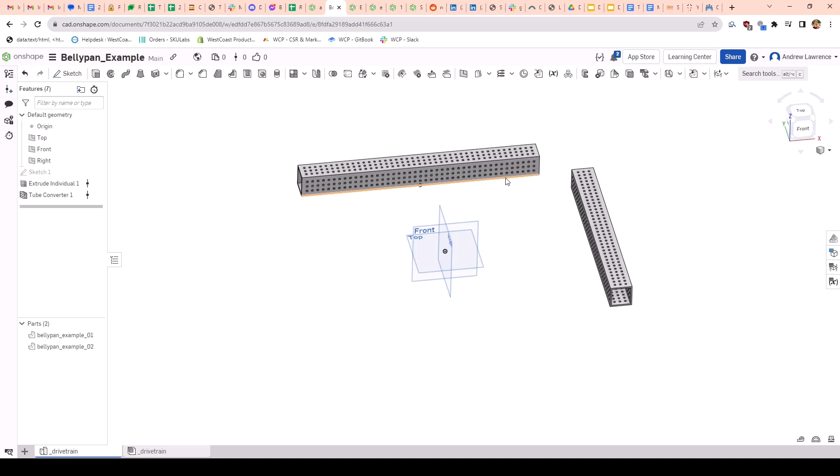So this is the assembly that we have so far. If we go over to our part studio, we have these two parts made right here. These tubes are the drivetrain tubes, as seen in the positions of the drivetrain.

If we go into our master sketch here, you see the sketch drawn out so that everything is in the correct location. You see the little swerve module over here in the corner. I know the student robot project does not have it in this orientation, which makes things harder, but I trust you'll be able to figure it out. The solution between what you have and what I have is not too difficult to solve.

So our belly pan is going to go underneath the tube. We're going to go down there and select a face, click Shift S to create a sketch, and N to go normal to the plane.

So this is what we have right here. We're at the face at the bottom. We're going to start with a large rectangle, so I'll use the rectangle tool.

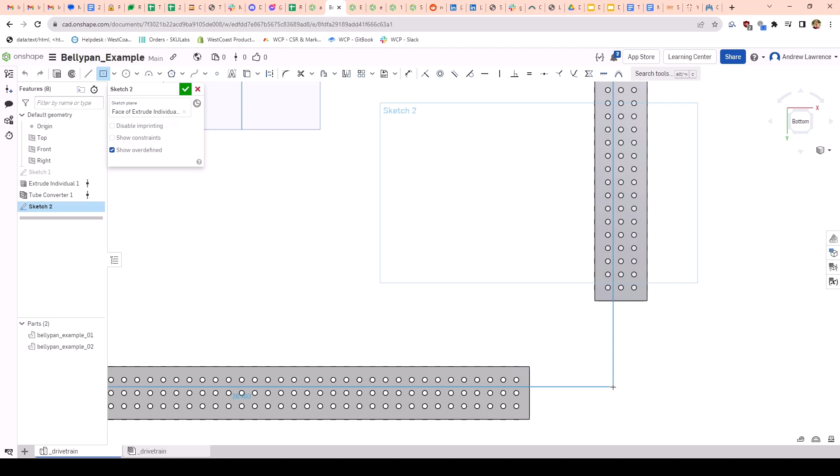I want this rectangle to slightly overlap the innermost layer of holes on each tube. Since this is the center of our robot, we know the other tubes go here and here. We can just use these two as the reference.

So I'm going to place a point inside some of these holes. That just gets me the center of the hole to reference.

If I were to dimension off of the hole by itself, as I'll show you here, if I try and dimension off this hole to this line, it's going to give me either the least or the greatest distance for some reason. If I go to the far end, it'll give me the greatest distance. And I don't want the edge of the hole, I want the distance to the center.

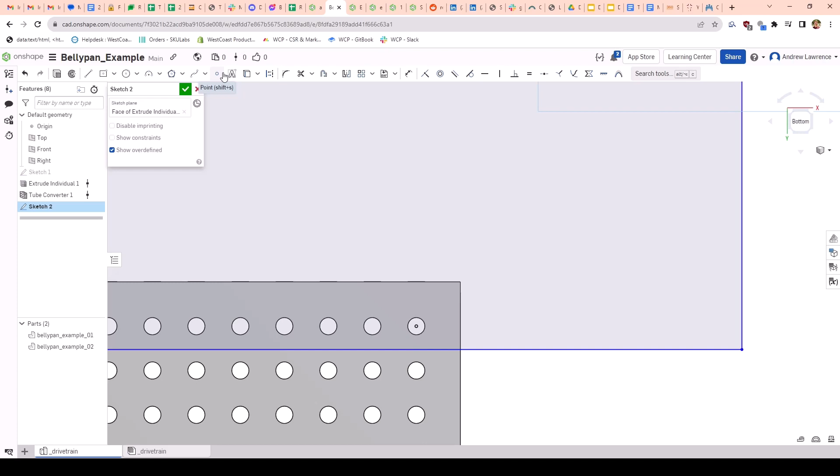So I put a little point in there. I use Shift S, the same command to start a sketch. It gets you a point when you're in the sketch area. Or I can come up here, select point - see how it says Shift S up there. So I put a point in the middle of those holes.

And I'm going to dimension from those holes, or from the point, 0.25 inches. So we want to go about a 1/4 inch out.

I like this value for two reasons. The first is that we minimize overlap with the other sides, so we're not covering these other holes - they're still useful for other things. And also it keeps our belly pan no bigger than it needs to be.

This is all we need. You don't need double layers of mounting, so we'll keep it there. And you can see our sketch is now fully defined. We have a center point for our center point rectangle, and then these two dimensions dimension the length and width.

Because this is all top-down design, it's all referencing other previous features. So if we click, we can go down here, we can see our width. It says length, but our width for our belly pan is 25.5, our length is 28.5. I always use, in a rectangle, width is the shorter dimension and length is the longer one.

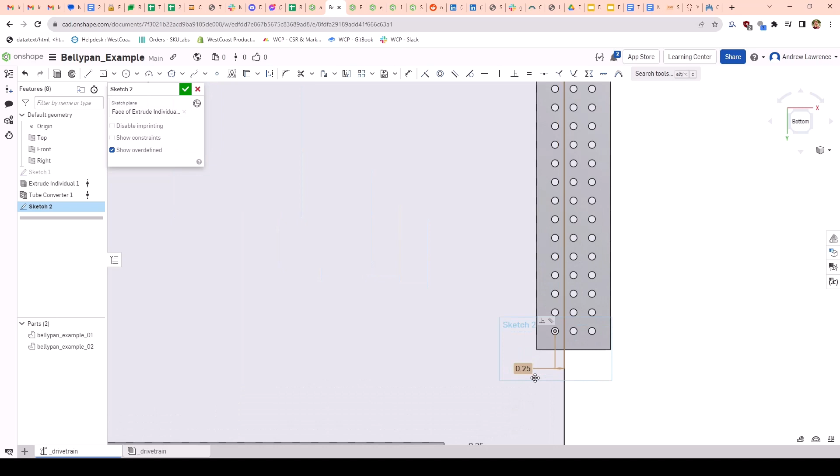That doesn't really make sense, it's just some arbitrary system I've used over the years. I don't know, it makes sense to me. If you have a rectangle, the width is the shorter end. But do whatever you like. We know those dimensions, and it's important to know them - we'll come back to those later.

So alongside this, we have the rectangle for the shape of it, and then we also need the mounting holes. Luckily for us, if we're designing this the right way from scratch, we have the tubes in the right locations - we can reference those holes. So I look here, I have those holes already there. So I'm going to click U for the use command.

It's the use project convert command. My cursor's turned into a little reticle, a plus sign. I'm going to go highlight all those holes, making sure my highlighted area is over the holes but not over the line I've made. If I do that correctly, give it a second, it'll first select the outside, then realize I want the inside, and there it goes. It has selected all the holes, so those are now sketch entities I can use.

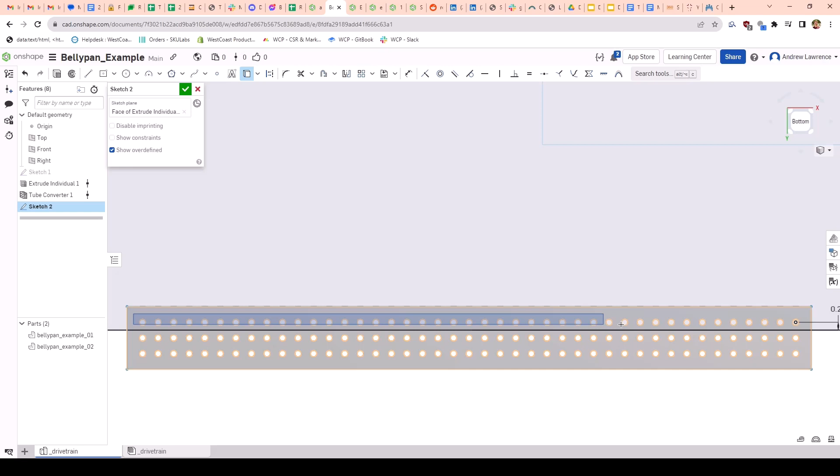I'm going to do the same thing here at the bottom one. I'll click and drag in there, give it a second. It's going to select the outside first, then it realizes, nope, you want the inside, and it selects the features on the inside. So we get those. Having those is very nice.

However, we want them on multiple sides, so I'll create 2 sets of lines. Onshape is being slow because I'm recording, so give it some time, be patient. I'm making these lines midpoint with the origin, and I can make them construction geometry. The purpose for these lines is to give us a mirror plane, which will mirror these holes over to give the mounting holes for the other sides.

So over here, I go to the mirror command. It says select a mirror line. I'll select the horizontal line, and then I'll click and drag to select all these holes. Give it a second, there it goes. It even has a little point in there, that's fancy.

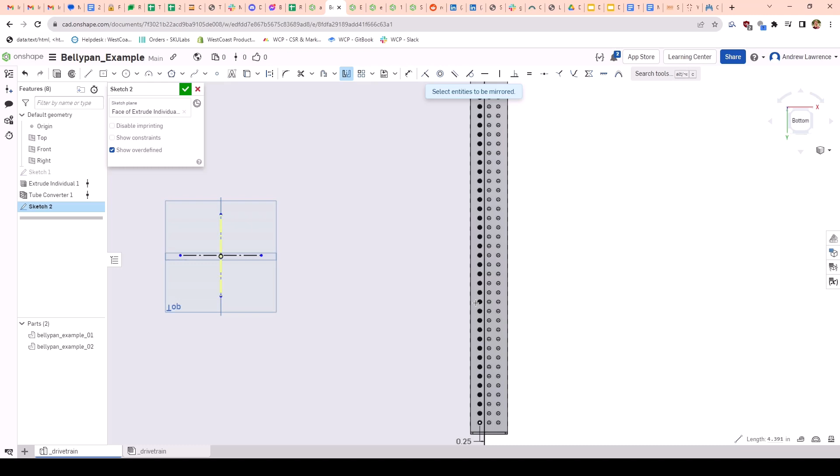Then I deselect the mirror command and reselect it, which allows me to pick a new mirror line. So I'm going to pick the vertical line, and then let's see if I can get it outside of that command. Select these. And there we go, so we have the outline shape of our belly pan.

We have all of our mounting holes. That's a good start, so we can extrude this. We say Shift E for extrude, and you can see it's extruding down from the tubes. We want it to be a new part, blindly extruded, for 1/8 of an inch, 0.125. That's going to be the thickness of our belly pan.

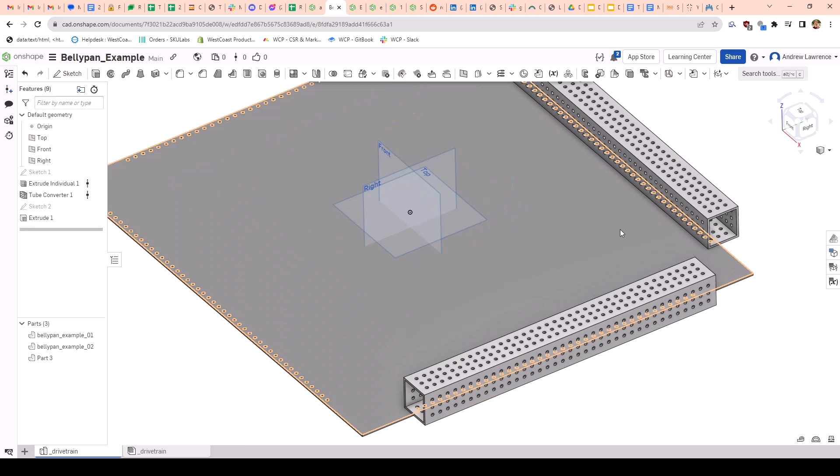So we have this, you see the corners do overlap with the swerve. Don't worry, we will take care of those later. But for now, let's focus on getting the diamond pattern in, which is a very fun part. I'm going to open up a new sketch on the large face of the belly pan, and I'm going to do 2 things.

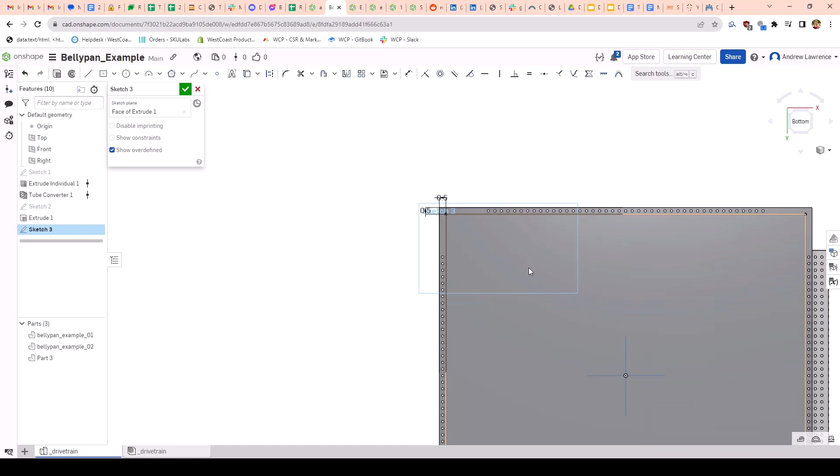The first thing I'm going to do is create a rectangle that is exactly 1/2 an inch from the outside faces - 0.5 and 0.5. This rectangle is to define the bounds of which areas are included in the diamond pattern and which are not, so we don't want cutouts where the mounting holes are, that would be silly. So we have that rectangle, and the dimensions of this rectangle are 27.5 long and 24.5 wide.

Good numbers to know. Now we're going to create a line using the line tool - it'll be construction geometry. We're going to make a diagonal line from one corner to the other across, and this is going to be roughly the line for our diamond. We're going to have a continuous line that way, you'll see what I mean in a bit.

We'll go up to a corner now, and we're going to make a little rectangle using 2 lines - one that goes horizontally from one face to the diagonal line, and then vertically to the other. Something like this, you should have them coincident on this line. I can drag this point and move it roughly evenly there. So we're going to have this, and then we're going to do another construction line from these corners.

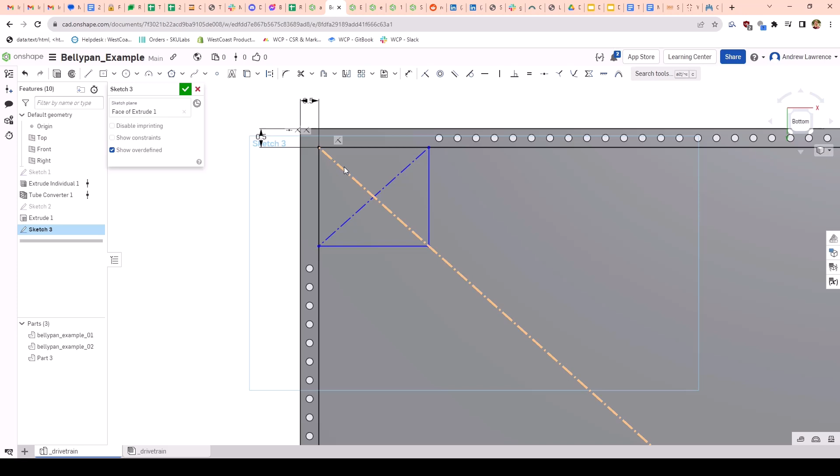So it almost looks like we have a little flag here - the big construction line going across the entire diagonal of the belly pan, and then this little one just for the section we created. Now this is a semi-quadrant of a diamond. If you imagine what a diamond looks like, it would be like a section of this, but then mirrored across. So this is half of a diamond, this is half of a diamond, this is half of a diamond, this is half of a diamond.

We're going to take these little diamond halves and pattern them to create full diamonds. But in order to do that, we need to know how big the diamonds are. So we're going to take one of our dimensions, usually the length, this 27.5, and take this section of that distance and make it equal to that length, 27.5, divided by some whole number. This whole number is going to be the number of diamond patterns that we're going to have.

The larger the number, the smaller the diamonds, and the more material you have on the belly pan, the heavier it is. With this specific belly pan, I am not trying to optimize for the least weight. I'm actually trying to get a heavy belly pan, going for almost the most weight.

Which some may find counterintuitive, but why am I pocketing a belly pan if I want it to be the most weight? The answer is I'm not pocketing for weight, but instead for ease of wiring. Having the little strands of the diamonds in a belly pan makes it very convenient to mount things to, and to route wires and tie zip ties around. So I want this to both be heavy, but also functional for our electronics.

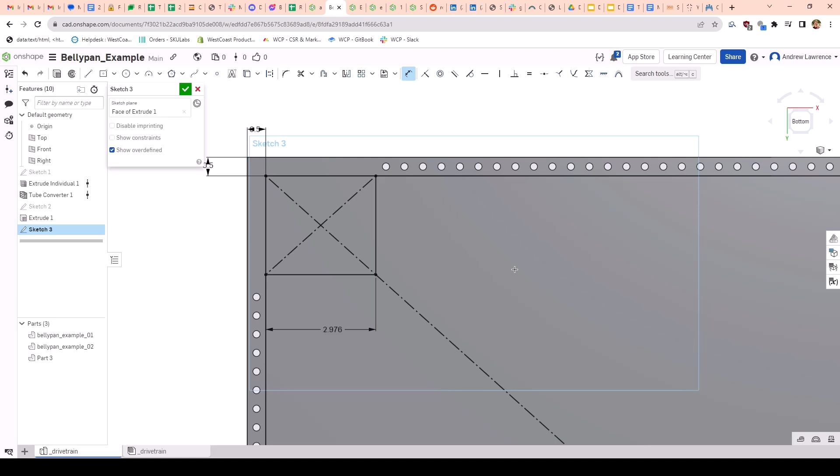And it makes it about this size, some arbitrary number, 3.438, probably 3.4375, because it's a nice 8th division. In setting this up this way, this short length here is 1/8 of our total length line. And because we have that diagonal and made these geometrically consistent, this short section is exactly 1/8 of this height. That's a nice geometrical solution, which is going to make our pattern very easy.

The next step is to actually create the strands for the diamond. Now in SolidWorks, you would use the offset entities tool, which we're still going to do here. But the nice thing about SolidWorks is you can offset entities in multiple directions. So I can select a line and say, I'd like you to add 1/8 of an inch of offset to either side, and it'll create 2 lines, treating it as a singular entity. That's not something you can do through Onshape that I am aware of.

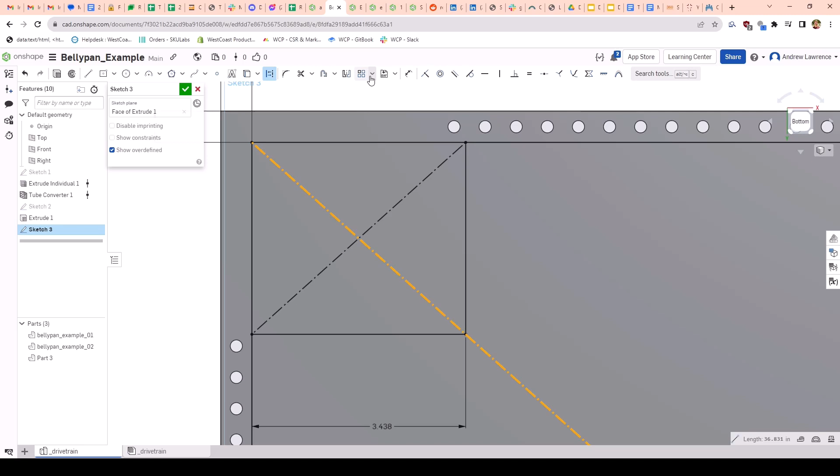So if we go over to offset, click O for it, all it does is give you a prompt to offset in a certain direction. So I have this orange, this large line selected, highlighted in orange. You can see this light blue dashed line is the line it wants to create as the offset. It wants to put it on this side, so we're going to say yes, and set that distance to 1/8 of an inch.

So this is only half of our strand. The other half's going to go on the other side, so this strand width that we're going for is 1/4 of an inch. And right there, I've changed it from construction geometry to a solid line because we want the solid line.

So we're going to do the same thing over here, same line, exact same line. We're going to change the direction, and go with the same width of 1/8 of an inch, and change that from construction to a solid line. So we have a total of 1/4 inch thickness, an 1/8 inch bisected by the total line.

If you are trying to save weight on your belly pan, you can make this thinner. I have seen people do as low as 5/32.

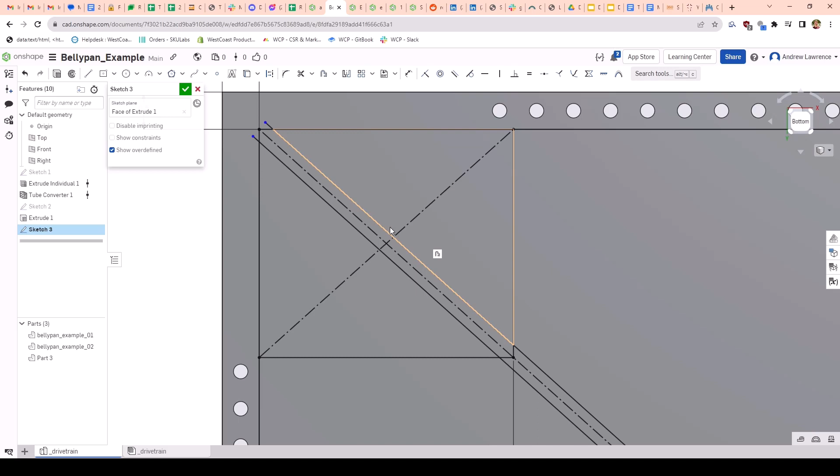It does make a little bit of a weight difference. I honestly wouldn't optimize that heavily for weight in this area, especially down low near your drivetrain is where you want weight. So I find a quarter inch is good. I've seen people go more, but I haven't really found that necessary. To each their own.

So we've done the two offsets for this line, and then we're going to take the other line and do the exact same thing. We're going to offset that by an eighth of an inch. I'm going to make that solid line offset by an eighth of an inch, and this time reverse the direction. 0.125.

Okay, so now we should have a more completed flag with actual different sections, so these three or four cutout sections. This is exactly what we want. As you see, the endpoints aren't fully defined, but I just don't care about that. If you really want, you can make them coincident, but it doesn't change anything.

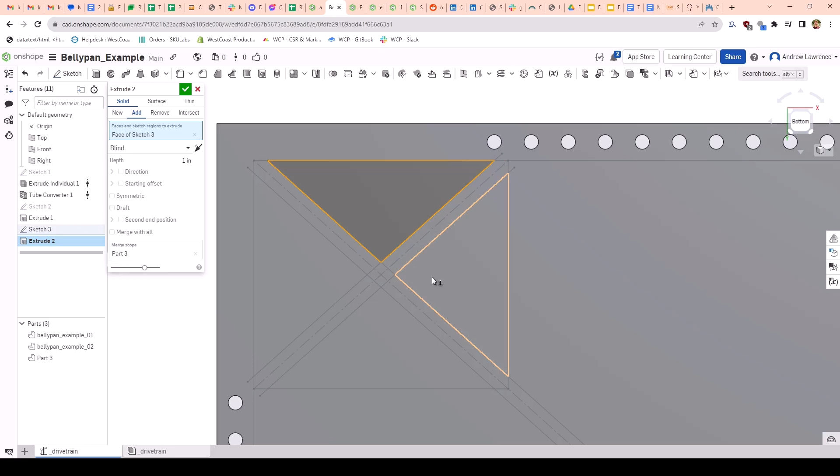So now that you have this, let me zoom in. This is our belly pan in our part studio. We are going to extrude cut, so Shift E, to extrude those four sections. By default it's going to select some weird stuff, so I'm just going to deselect whatever it selects by default. I'm going to select those four triangles and say remove.

Through all, and merge scope should always be with this part, so I don't want to cut. If I'm doing this in one of these corners, I don't want to cut through one of these tubes by accident. But you'll see this little pattern here, we're going to say check mark, and that's good.

That's most of the work for creating the diamond pattern, because the next step is just the pattern, and that's going to be very easy, although it takes a second or two for the software to process it, but we'll see that in a moment.

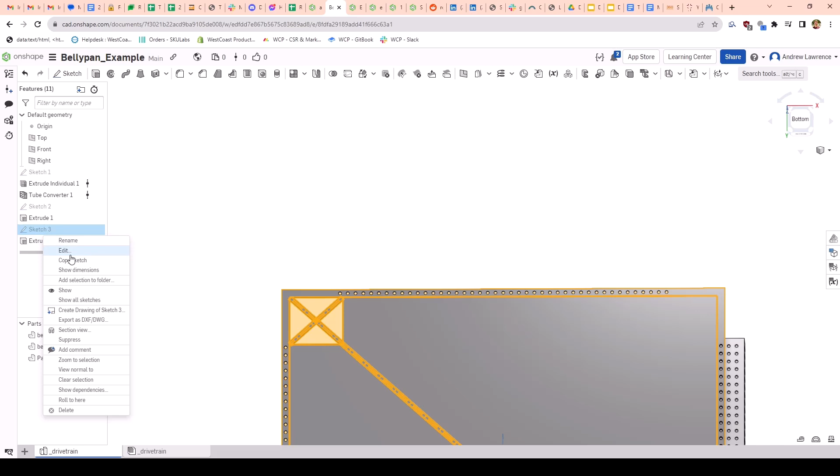We're going to take this and pattern it however many times. It's also now important to remember our magic number, so I'm actually going to go back to this sketch real quick. I need to know what this length is and the width length. So this is 27.5, it says down here, and this is 24.5. So 27.5 and 24.5 - got to remember that.

Now we're going to find the linear pattern feature in the features menu. This is not a sketch, this is in the top level of features. Find the linear pattern, we're going to select a feature pattern, and under features to pattern we're going to select extrude two, the one we just made. Under direction, we're going to select our longest dimension, our length.

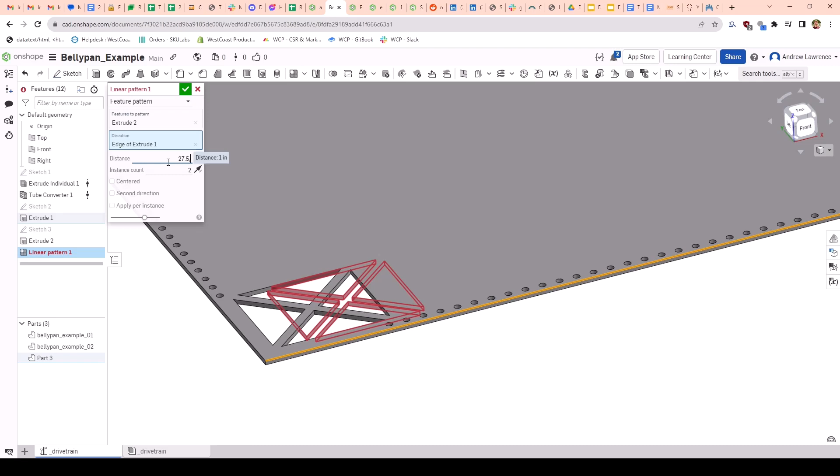You can see it's trying to go in a certain direction, so we will change the direction. The distance is going to be that magic number, 27.5, divided by however many sections we had. We chose 8 sections earlier, so 27.5 divided by 8. If we did it right, there you go - that looks really nice. Our instance count is going to be that solid number, 8, whatever whole number we chose earlier.

And you can see that pattern's perfectly over. Then from here we're going to have a second direction, and we repeat the same thing. We select the direction, we select 8 instances, and it's going to go in some direction - we're probably going to want to flip that. And then it was 24.5 divided by 8, so I'm putting that info in.

Onshape's taking a minute to load, but hopefully if we did this right, and I remembered the numbers correctly since I didn't write anything down, it'll load magically and everything will look nice, and we'll have our diamond pattern. That's really all there is to it.

Okay, well, we got the direction flipped. It's slowly getting there - there it goes. Okay, that's beautiful, very nice. Say check mark to complete our command, and there's our diamond belly pan.

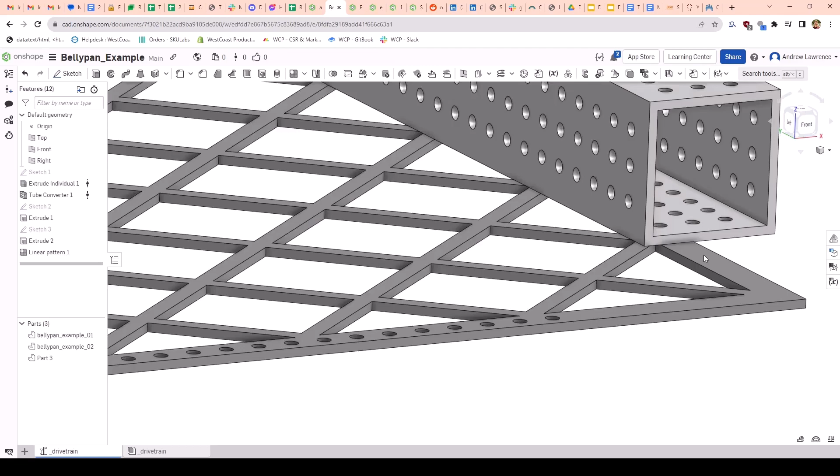This gets most of the work out of the way, so that's always very nice. So there's a couple things to do next: we need to make the cutouts for the swerve modules, and we need to mount the electronics. Oh, the third thing is we need to add the actual fillets into the corners. We'll get there afterwards - fillets are one of the last things you should do.

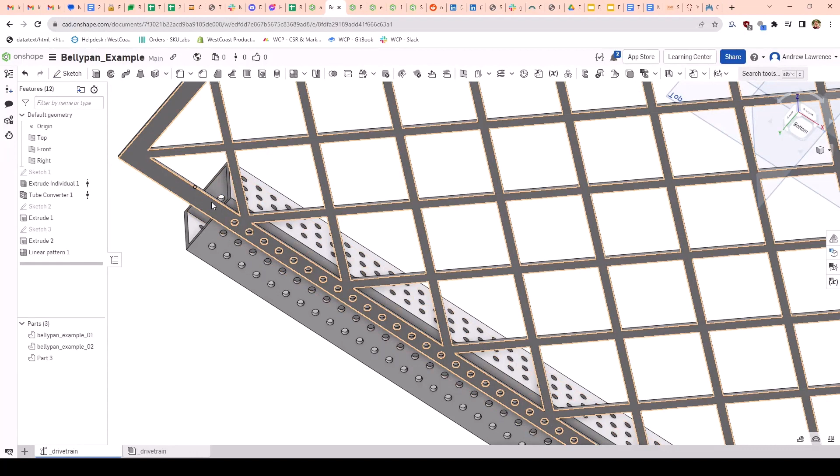I don't think there's a correct order—you could do one and then the other, or vice versa. What I'm going to do is make the swerve module cutouts first, since that's easy. I'll go to the bottom face. You can choose the top face too, it doesn't matter, but I like working on the bottom because it's the most open.

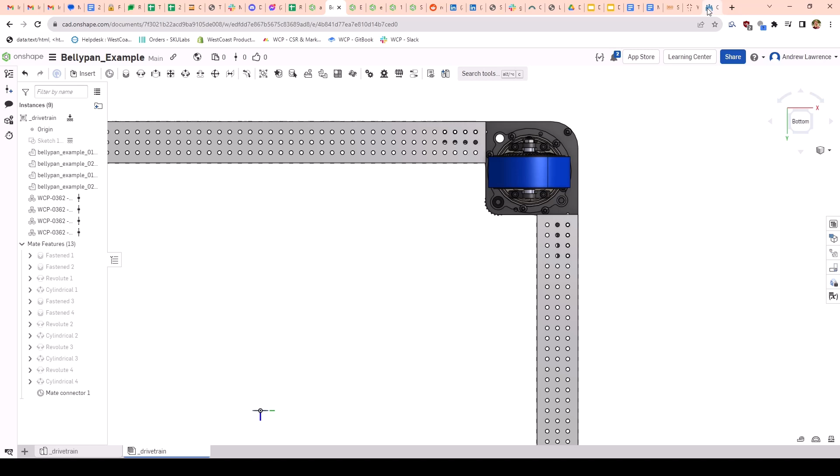I need to find the size of the selection I want to cut out. I can go over to my original sketch—if I show the sketch, I see this corner, which shows my swerve module. This is the maximum dimension of the swerve module, represented as a square. If I go over to my drivetrain and look at the bottom, it's not a perfect square—there's a rounded corner on the edge—but the dimensions are holding true, and that's really all I care about. We can add a nice fillet in there later.

I'm just going to create a little rectangle by hand. I know it's not perfect, but you make do with what you have. You could also just use the rectangle tool—probably a better option.

So make that line horizontal, and I'll make this one vertical. This point is defined for some reason, I don't know why. Is this line coincident with the weird point? This shouldn't be defined—I'm just going to do it the right way and use the rectangle tool. As I always tell my students, do it right the first time.

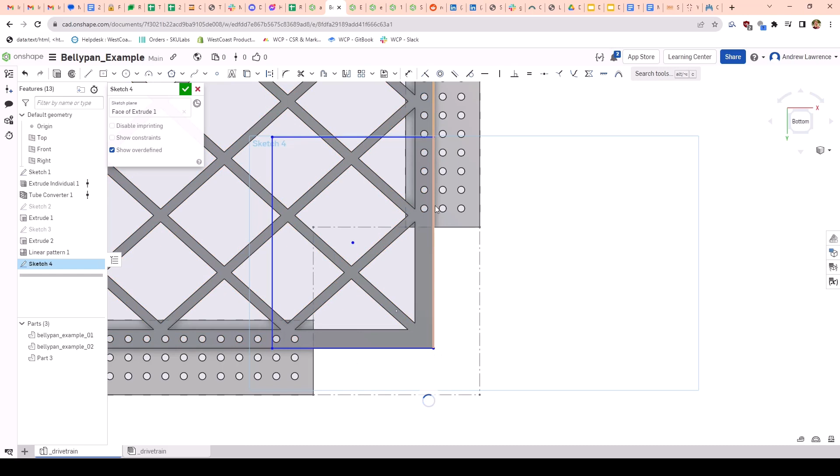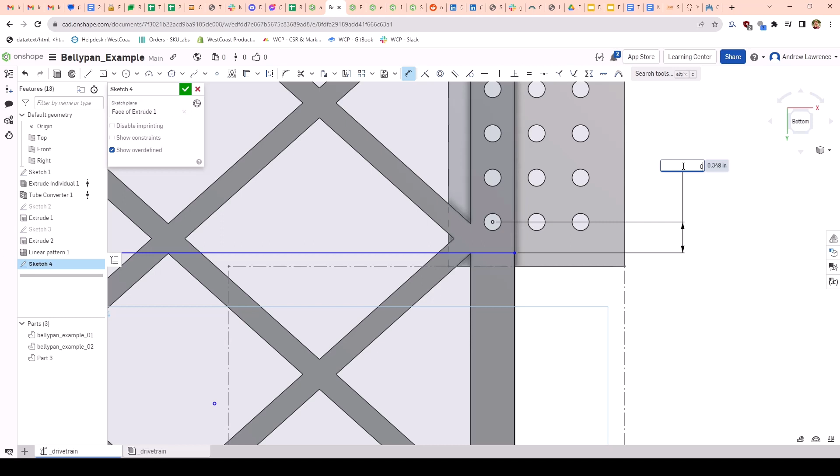So I've got the rectangle, and I'm going to bring this down here. Typically I like to set 0.25 there, so I have a 0.25 offset. Wait, nope, I need to do it differently—I'm still caught in my SolidWorks ways. I need to add the center hole point right here, because it's going to dimension it from the maximum or minimum of the circle, which, I'll be honest, is pretty stupid. But that's not for me to decide—that's for the good makers of Onshape.

Alright, so there's my rectangle. I'm going to select these lines and use them as mirror lines, mirroring this little rectangle to all four corners. Once I have it in all four corners, I'll remove through all, and I'm left with this little situation here.

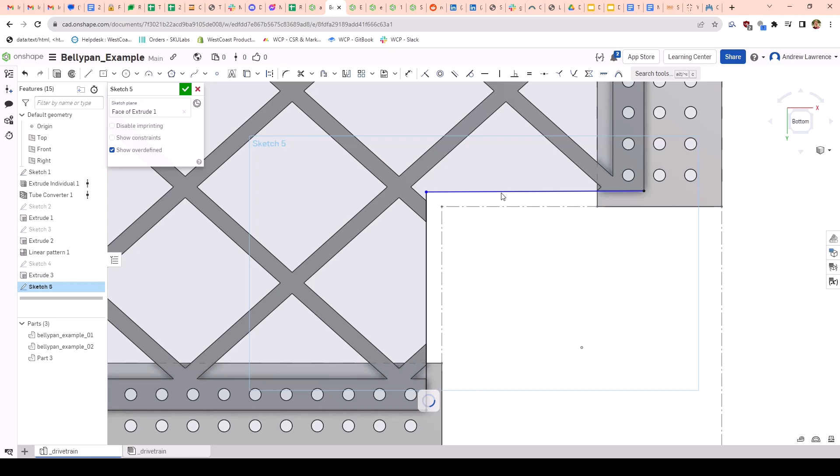So I have this weird cutout. In order to fix that, we don't want to just leave it—that's pretty bad practice. We're going to create a line that goes up and across. Assuming this line is horizontal—Onshape is being very slow because I'm recording, so please bear with me—this line is going to be that outer surface, and we're actually going to want this outer surface to be a strand.

So we're going to make our own manual strand here. This is one of those strand-type CAD models. I'm going to make this little piece of material we're going to add in, and it's going to be the same thickness as my strands. It doesn't have to be the same thickness as yours, I suppose, but I always do it that way because I think it looks nicer. So that's going to be a quarter inch for both of them.

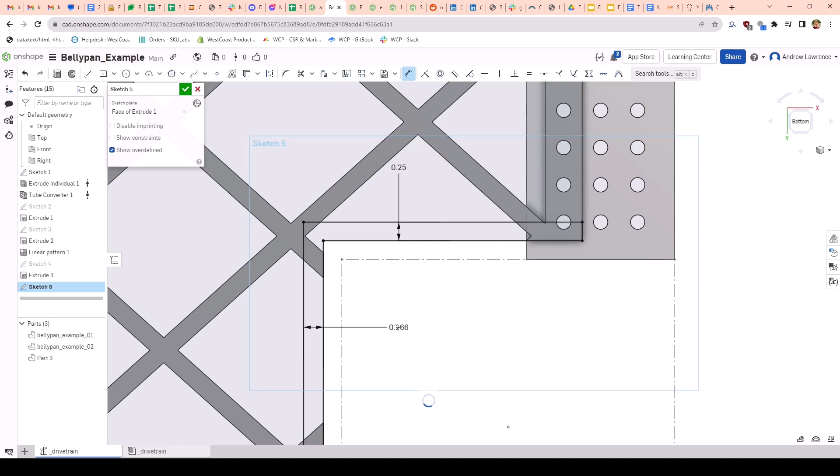So there's a couple things we want to look at, and it's really these extenuating corners. We want to avoid a situation like this, where we fill in a weird tiny corner and create two tinier corners that we can't actually fillet. I can put one fillet on this corner, but I can't put the same size fillet twice in here—it just functionally won't work. So I'm going to add a little bit of a fill-in.

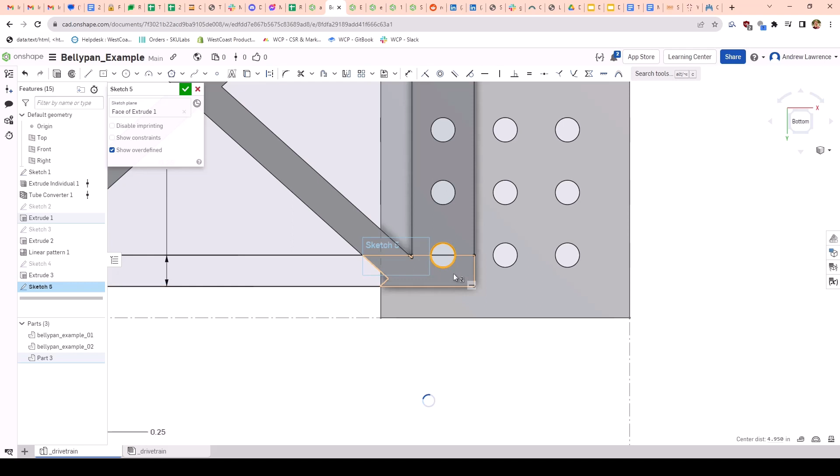I'm going to add little details here and there just to make sure—I'd rather just turn this into a normal fillet rather than having two tiny corners that cannot be filleted. This is all fine, I want to fill that in anyways. This doesn't look like it extends over, so as long as it doesn't extend over, it'll get filled in, and that's okay. Same thing over here. And then I'll select the 'use' command on this because I don't want to fill that in either—I want a singular contour.

So this one actually looks pretty straightforward. That's nice. Whenever I do this, I just deselect whatever it gives me, and it lets me select the contour I want. I don't really care about getting this area—there's nothing there. All right.

Oh, careful. Okay, I think that should be okay. We're going to add this. Oh wait, oops, what am I doing? Silly Billy, gotta mirror it.

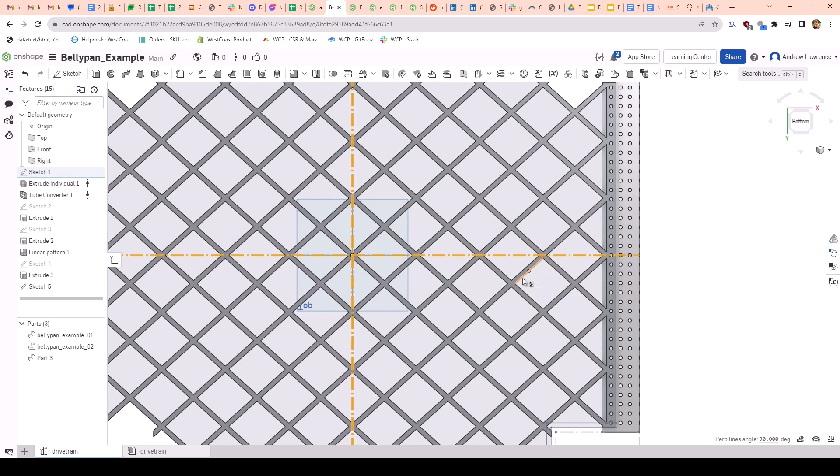So the same thing we did with the cutout, we're going to create... oh, it's not letting me. Oh, because I'm not in a sketch. Just trying to use these construction lines using the use command, and it wouldn't let me. Silly me forgot that I had to be in a sketch to use sketch features. Funny how that works. But yep, go back to mirror.

Select that line, drag and select everything, let that mirror over. Same thing over here.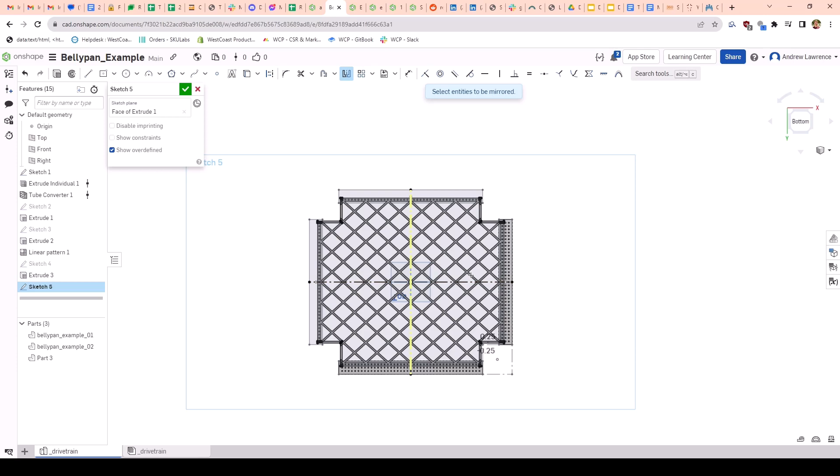You could also do this with the mirror feature. Depending on who you talk to, some people will say that mirroring things in features is better practice than mirroring them in sketches, and they're not entirely wrong. But I think there's certain things I'll always do in sketches, and there's certain things I'll always do in features, and it's just important to have that baseline of which is more appropriate when.

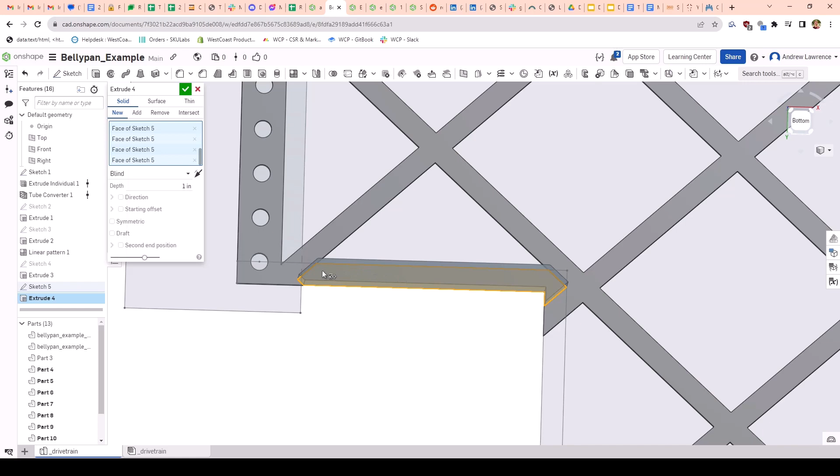Yep, fill that in. I will say most things I will do as a feature. It's generally good practice for CAD. But for specific circumstances, like in Bellypan design, I will tend to put things into the sketch.

So I have all these separate extrudes. I'm going to add them to the Bellypan, and I want them to go up to the face, the opposite side face. So I'm just going to select the face from the other side. In theory, it should go right up there. That looks nice. And if I did this right, I can say okay, and there I go.

Not too shabby, I must say. Not too shabby at all.

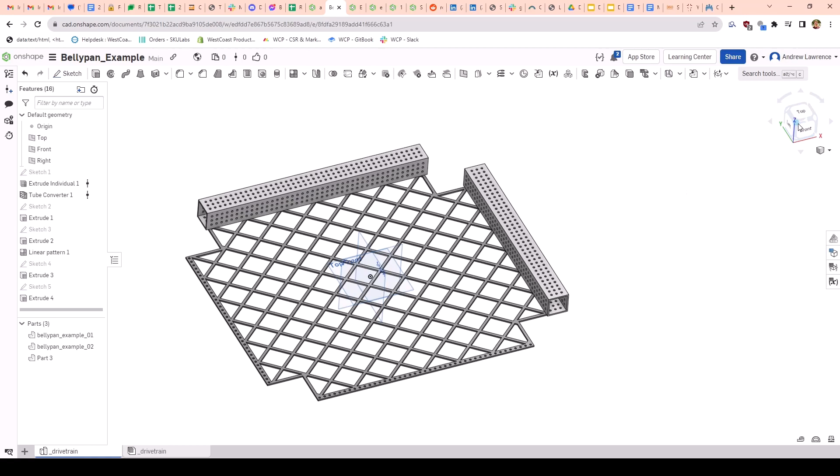I'm gonna hide this sketch now just to check a couple things. I think technically this is the correct orientation, or no, wait, this is the correct orientation. I really just inspect one corner unless I end up having a problem. Once you can confirm one is good, if you did them all the same, then they should all be good.

So here we go. This is the Bellypan by itself. It doesn't have any attachment points yet. I'm just gonna real quick give it a name. Bellypan example 03, beautiful name.

I'm going to give it an appearance and a material. For this one, I'm actually going to make it out of steel. And that's, again, part of the intentional desire to have weight down there. That's a good color for steel.

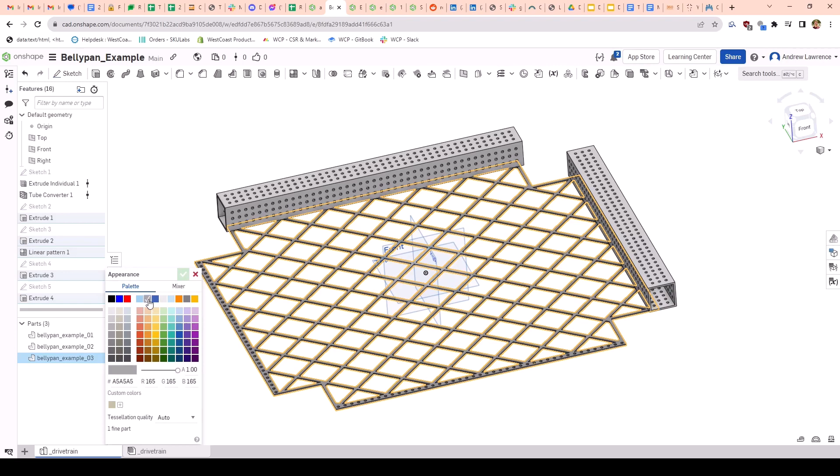Let's see, how heavy is it? Go to properties. I want something between like 7 to 10 pounds. All right, 6.1, not terrible, not great. If I really wanted to optimize for weight, I would probably increase the number of diamonds, something closer to 9 or 10.

And the reason I say these are good solutions is because this is something I will ultimately send out to Fabworks and have manufactured for us, and they don't care how many diamonds are in our Bellypan. So we can modify that to fit whatever our needs are.

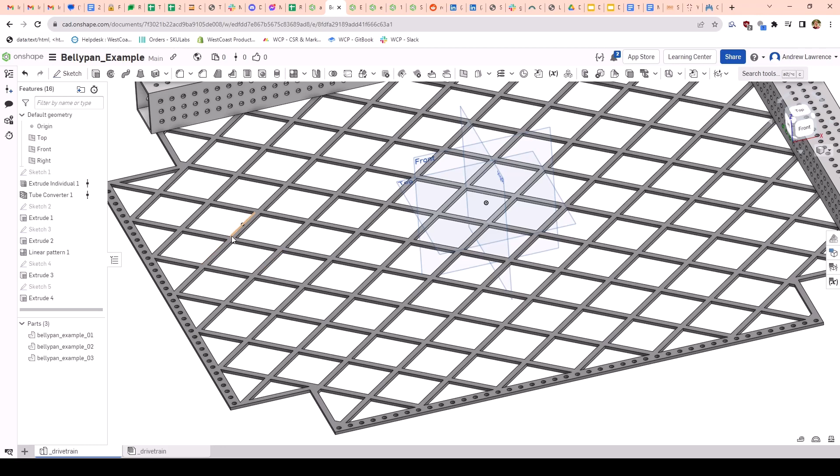Alternatively, if we're actively trying to have less weight, obviously the first thing is to start with an aluminum Bellypan. But then we can look into things like using more diamonds, or we could have a solid thinner Bellypan. A great way to decrease weight is to just make it less thick. It's currently 1/8 inch. 1/16 inch solid aluminum is a great lightweight solution for a Bellypan.

But now on the next part, electronics mounting. There's two ways to go around this. There's the top-down Onshape way, which fully utilizes the top-down design functionality that Onshape is built around. And then there's the bottom-up SolidWorks way, or not necessarily SolidWorks, but we used to use SolidWorks. So there's the bottom-up method and the top-down method.

The Onshape top-down method would be: we take this Bellypan, insert it into the drivetrain assembly, and start placing electronics components. Once we have them all placed and permanently mated, fixed or fixtured, we will do an in-context edit of the Bellypan and add the features that way. The nice part is if anything ever moves, it in theory would update correctly, although this is such complex geometry that getting it to update correctly is really annoying.

And that is the theoretical proper way to do it. However, I have yet to find a way to use the mate connectors and the mates in Onshape in order to really easily position things, position the control system components at random orientations without having actual features to mate them to.

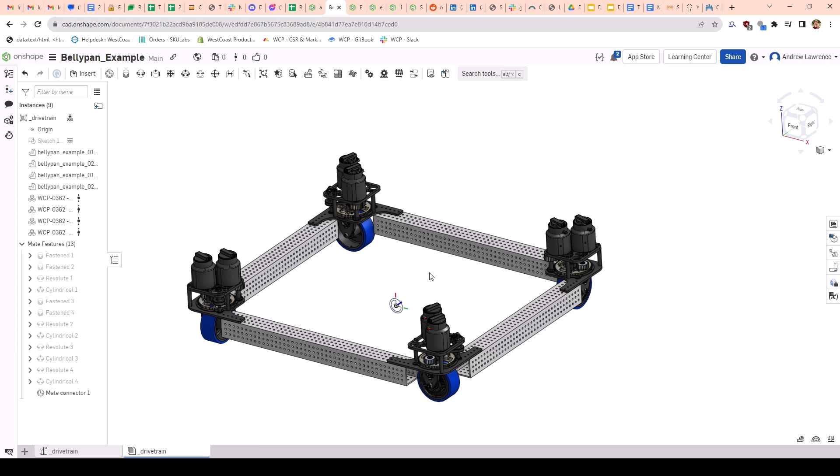Or I would use things like the width mate, which allows you to put something in the very center of two other things. So I say, oh, I want my PDP or my PDH to be centered on my robot length. So I'll say it's centered along technically the width.

If I want it to be centered along this axis, I would use either a plane in the middle of the oddly shaped and oddly dimensioned PDP and mate that centered, or I would get something like a width mate, and I would choose either side of the PDP and then either side of the tube, and it would automatically center. It makes it very easy.

Onshape does not have that functionality, and maybe there's something I'm missing with mate connectors, but it seems like the best you can do is an offset distance, which is annoying because it requires some amount of measuring, some amount of math. And if for any reason your drivetrain does change dimensions, suddenly you don't have that symmetry anymore because it's a hard-coded number that you're putting in.

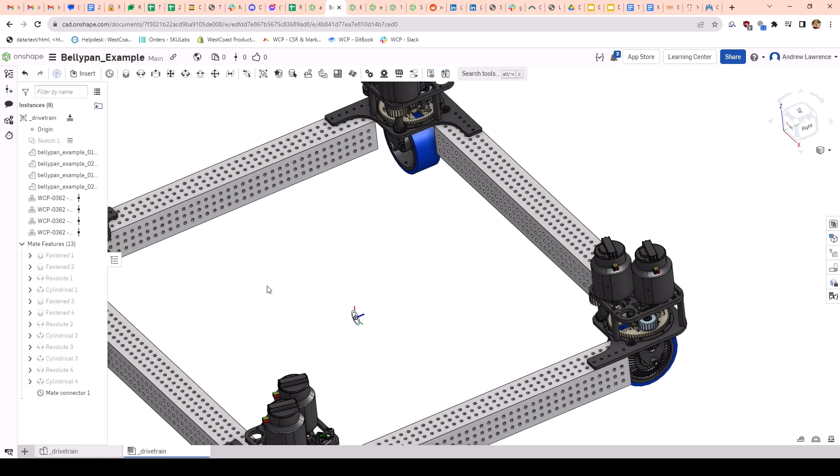You can offset from a certain surface. So if I say this is 12 inches from the left-hand tube, it could right now be symmetrical with both sides. But if something ever changes, and let's say the robot gets a little less wide for some reason early on, then that 12 inches is not going to be symmetrical anymore.

So this is a long-winded way of saying I recognize that there is an Onshape ideal way of doing this, and I hate it because it's not the workflow I'm used to, and that's what any CAD user will tell you. If it's not the one that they know how to do, it's bad. So what are we going to do?

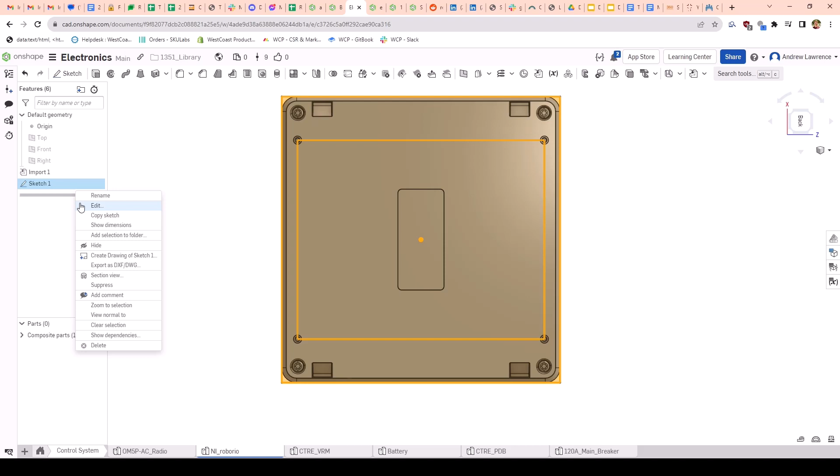What I've done is, if we go over to our electronics in our library, we look at our control system components. They're not all in here, but the ones that are in here have these little sketches in them, these little sketches with rectangles. And we're going to basically simple model the rectangles to be the control system components and their mounting hardware and mounting configurations.

And we'll model that in a sketch, and then use the sketch to create the mounting functionality, the mounting features on the actual Bellypan in the Part Studio.

So this is the Robo Rio. It has these tiny, I think they're 4-40 holes on the bottom for mounting. And then this rectangle represents the outside shape of it. I'm sort of just solving every control system component roughly as some sort of rectangle, because roughly they all are.

So if I were to make this over in the sketch, actually, I'll pull it up right now. I'll show you exactly what I mean. So I'm going to get this into the actual orientation. So if this is the isometric view, I'm going to say this is the front of the robot and this is the back.

If I go over to my drivetrain assembly, front, back. So I'm going to say I want my battery in the back. I want my PDP or PDH somewhere in the middle, probably my Rio in the front. I'll put a VRM off to the side somewhere near the Rio, or between the Rio and the PDP off to the side. We have a radio to place somewhere, but that doesn't really have mounting holes, so we'll ignore that.

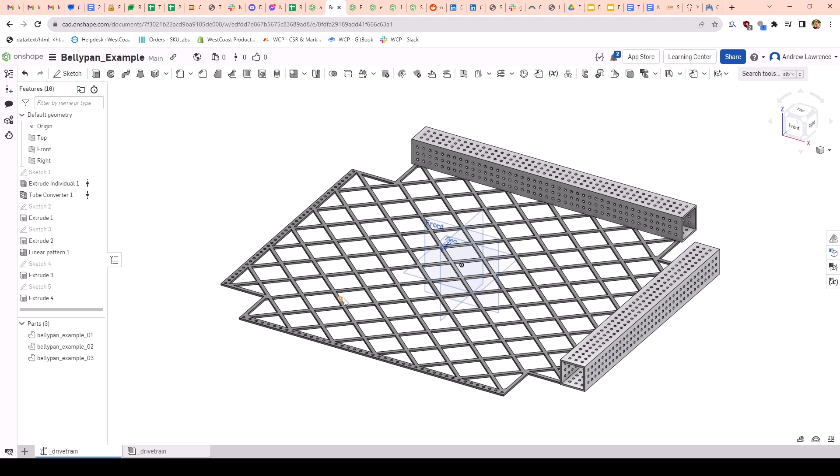So I'm going to start a sketch on the top surface. And I'm actually using the top surface this time and not the bottom. The rationale behind that is I want to actually see the tubes, where things would intersect, and make sure I can account for that.

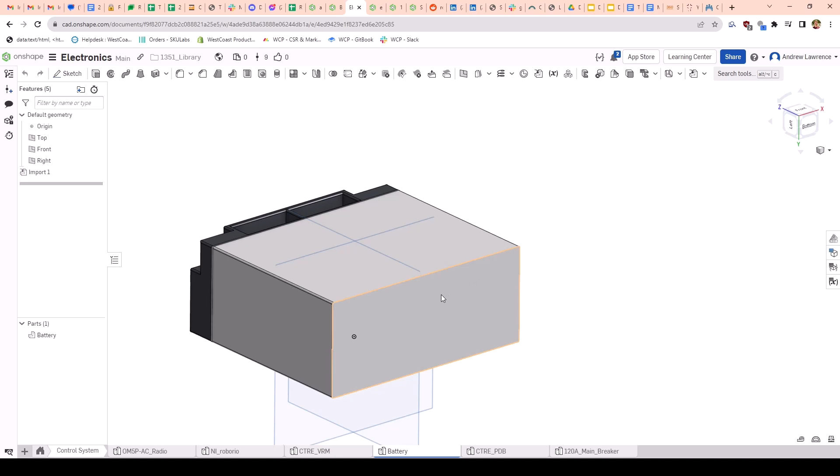So the first step is I'm going to say my battery is going somewhere. I need to figure out where my battery is going to go. So I'm going to model my battery as a rectangle, laying down. If I go over to my electronics, I'll find the battery. Let me exit that for a second. There's no sketch on this, but I'm just going to put the battery in this orientation. So it's 7.1 inches wide and I'm going to say 6.6 inches long.

7.1 wide, 6.6 long. 7.1. And I actually just broke my own rule right there. I used the shorter distance for the length. So yeah, I guess there's really no consistency here. Just ignore anything I say. Do what works for you. That's the best rule. So I modeled this.

I'm going to make a construction because I'm not actually using this geometry in a feature. Any geometry that you're not actively using in a feature, I highly suggest making construction. I made the center point of the line in line or horizontal with the origin, because the origin is a good point for me to reference because it is symmetrical with the component. Your origin in the Part Studio will not always be symmetrical with every component. So just be aware of that.

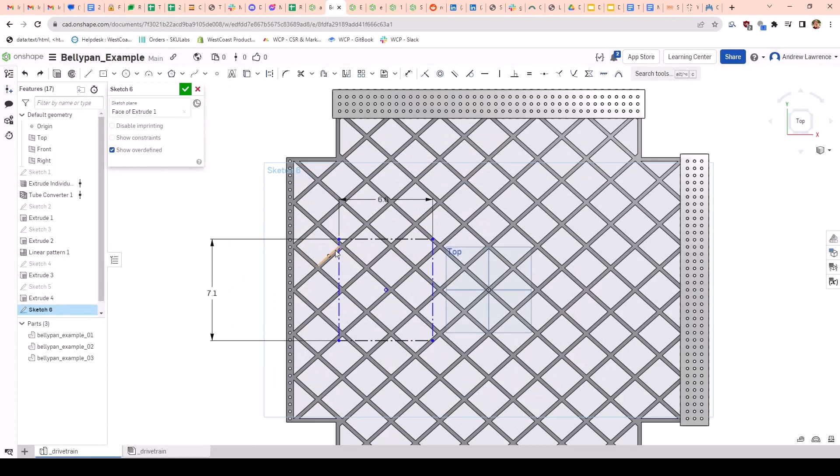And then my battery is going to be butt up right against my drive tube, but I don't actually have a drive tube here. So what I'm going to do instead is I'm going to show this sketch, and I'm going to use these lines again. I do love the use command. I love using old geometry, especially if it's relevant geometry, because then I can always go back. If I change the original one, everything else updates, and that's just good CAD right there. You'll love to see it.

So I'm going to take this line, the inside line of my tube. I'm going to say use that. And it gives me a solid line. I'll turn it into construction because I don't want to actually use it for a feature. I just want to use it for reference.

I'm going to mirror that line across. So select a mirror line. The center vertical line will be my mirror line, and the entity to be mirrored is going to be that line I just used. I realize now in doing this, I actually have this sketch. If you know, when I had that sketch hidden, I couldn't see it, but now that it's unhidden, I do have the sketch of the rectangle. I could use that, but I've got this already.

So I have this dashed line to represent the tube wall. So I'm going to say my battery is coincident with that. Now I'm not going to have a specific mounting feature for the battery. There will eventually be a plate that retains the battery that'll have mounting features. But I'm putting the battery here so I can figure out how much space I have for my PDP or for my RoboRio and so on and so forth.

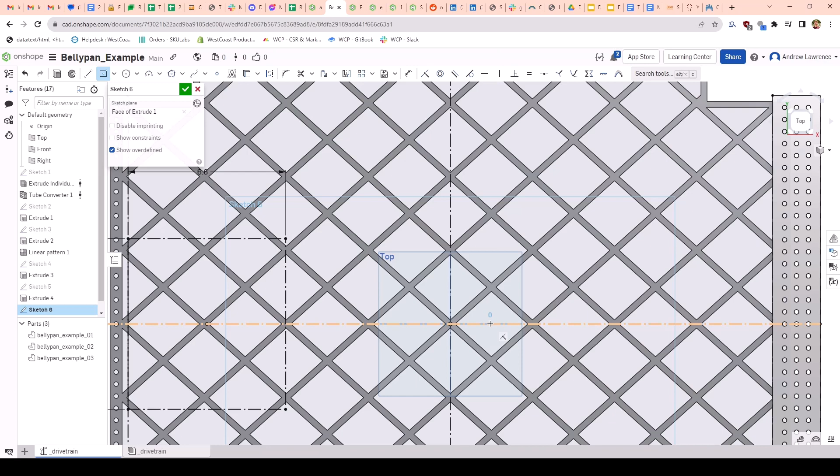Also, I suppose now that I have this center line, I can just use this for my next rectangle. So this is going to be my power distribution panel, or my power distribution hub, depending on which one you're using. And that is going to be modeled with two rectangles that share a center. And the rationale behind the two rectangles is important. The outermost one is the outermost dimensions and geometry for the control system component. So this is the physical space it takes up. So I know that I don't have two things intersecting.

The innermost is going to actually be the mounting holes, so the holes that are built into the component that I want to line up with my Bellypan. So if I go over to CTRE PDB, I have the lines. We select the outer line that says 7.586. I think I can just highlight that and copy. Let's see if I can.

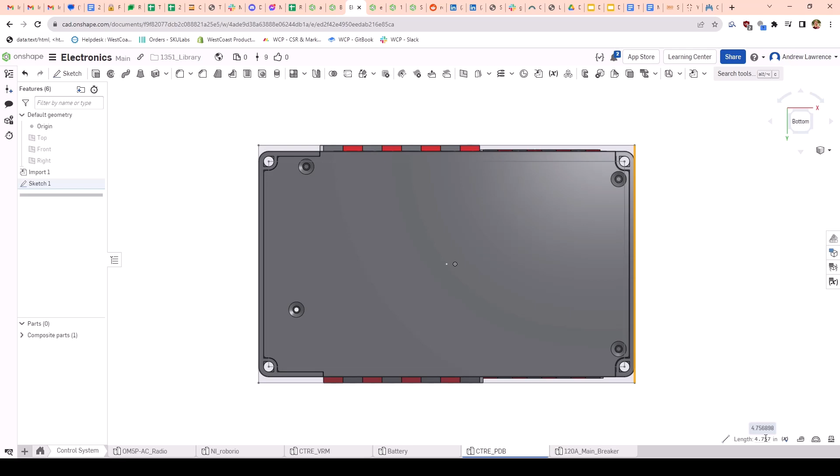I actually don't know if this works this way. I think that was good. Did it do anything? Yeah, okay, cool, I've got that. I copied that over. Where is it? This one. And then same thing for the width. I'm going to highlight, copy that over. This is going to be the outermost rectangle, the outer dimensions of the PDP.

And then, let's see, we get this inside line. Oh wait, whoops, I don't want the parallel distance. I want just the length of the line. Maybe that number looked big.

Now, a lot of these things, especially things made by CTRE, are just weird numbers. Like 4.110 is some arbitrary value that they figured was the right number.

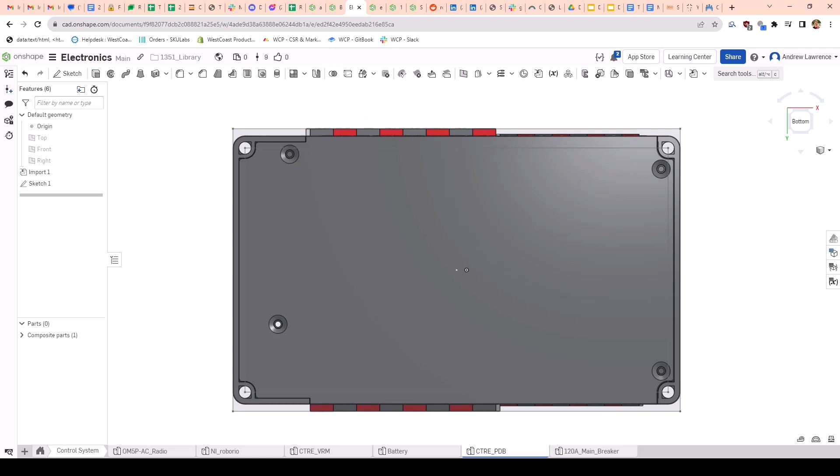And then I'm going to get the width dimension, 7.176. That's a size, all right. Those are numbers, and I can confidently say that those are numbers. Numbers no one's ever going to remember, but that's why we have CAD models, right?

And then I believe the PDB uses number 10 mounting hardware. Let's see, 0.21 - yep, that's going to be a number 10. And we're going to tap into this. So I'm here. So yep, I'm going to put number 10 mounting holes.

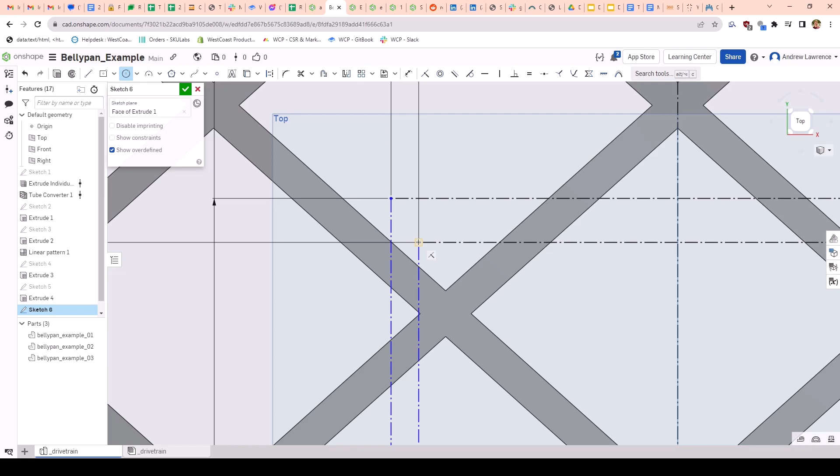So I'll represent these as circles. Set them all equal to each other. I'm going to say they're all 0.159.

And then we have basically our PDP - we can slide back and forth and position however we'd like. So I'm going to say I want our PDP to be 4 inches away from the battery. Why 4 inches? I don't know, it's an arbitrary size I chose. So there's that.

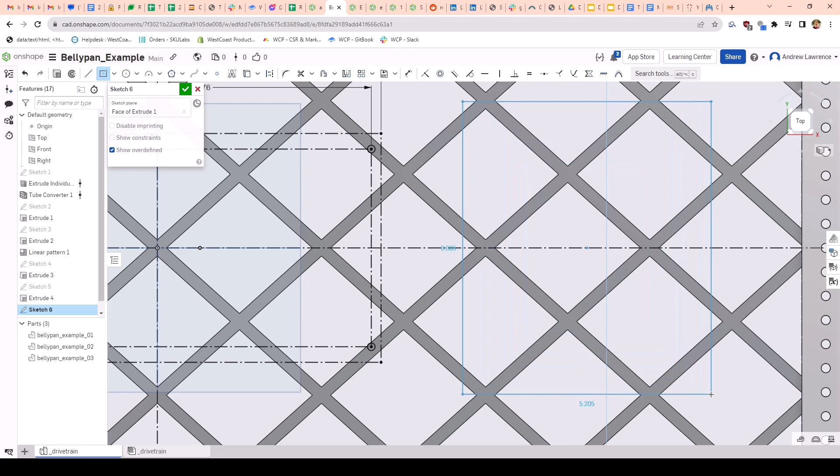I'm going to model the Robo Rio next, and it's going to be the same double - there it is - double rectangle, because it has an outside perimeter that we want to model, and it has mounting holes on the inside that we also want to model.

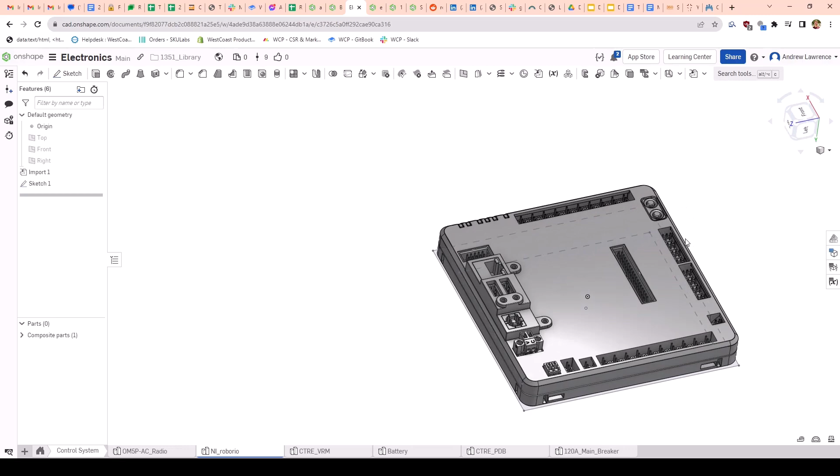Alright, then we go over to here. I find NI roboRIO. Let's see, the outside - if we actually look at it, orientation matters on this one a fair bit. We want it to be sort of like in this orientation. So what's this? This is 5.754, I don't know, something, just copy paste. And then the width, the length, or any of them, I don't remember which one is which, is copy pasted from this.

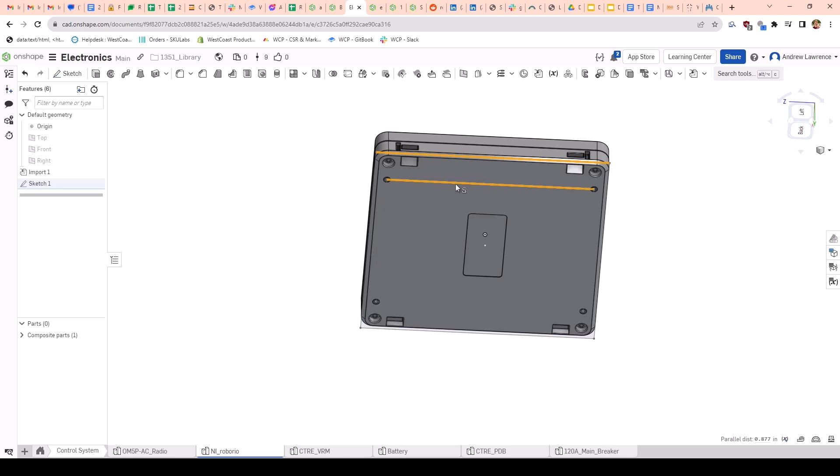Cool, and from here we need to get the mounting holes. So that's a - oh, and these ones are actually nice, so I can remember this one. This is 5 by 4. Yeah, good job to NI, they made very easy to use numbers, and I appreciate that about you. 5 by 4.

Now the mounting holes - oh, I think they are 440s. In which case, then we go to our handy dandy 440 mounting, or actually, oh, this one's going to be separate, because it's 440 tapped onto the Rio. So it's a 440 thread into the Rio, so I need a clearance hole. So 440 clearance hole is 0.112.

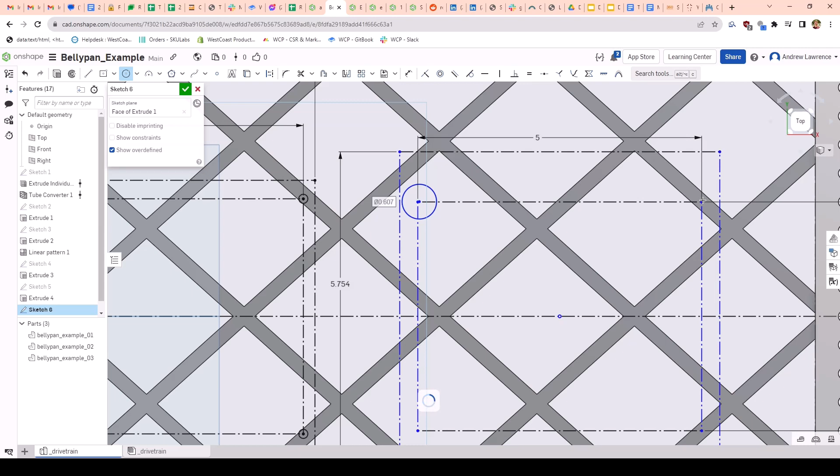Good to know. So for the PDP, we're putting the bolt into it, it's going to thread into the Bellypan. For the Rio, it actually is going to thread from the bottom through this 0.112 hole. I know that's not on the point, but I'll get it in a second. And it'll thread into the Robo Rio. That's some good design right there, that's real nice.

This is also another advantage of using something like FabWorks, in that you can make whatever size geometry you want, and the laser will just make it work. Previously, when we made our belly pans on our routers, we wouldn't make tiny holes like 0.112 because we use a 4mm end mill for everything.

So now we've got this. We probably want it a couple inches from our PDB or PDP. 2 inches looks okay, I see plenty of room around everything. Somewhere there will be a VRM, but I'll get to that later. Or, you know what? No, I won't get to that at all. I'm going to leave that as an exercise for the reader.

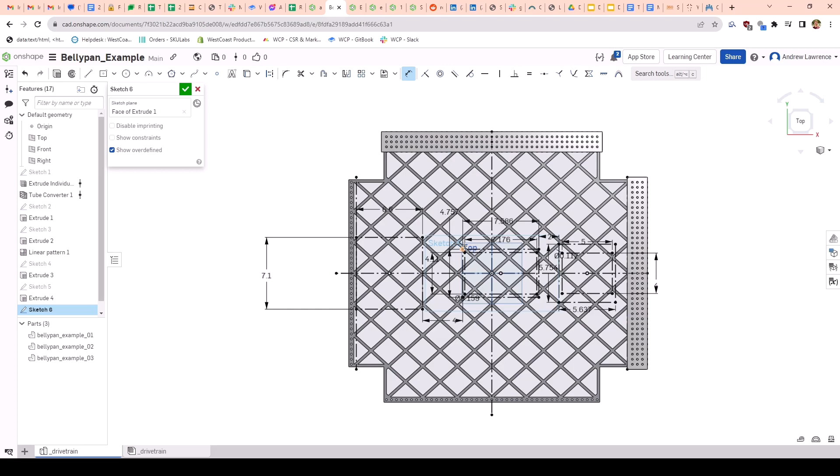So from here, we have our mounting holes. Now we need to actually create the material for them. So I'm going to create a circle around everything that needs material, just like I would if I were adding a feature to an already existing part. Because that's really what I'm doing, is I'm adding a feature to an already existing part.

And you're going to notice something - some of these holes, or some of these little materials I'm adding, are kind of out in the middle of nowhere. Really not anything, like they're not overlapping. Like this one especially, over here, it's out in the middle of nowhere. So there's a little bit of work that needs to be done for that.

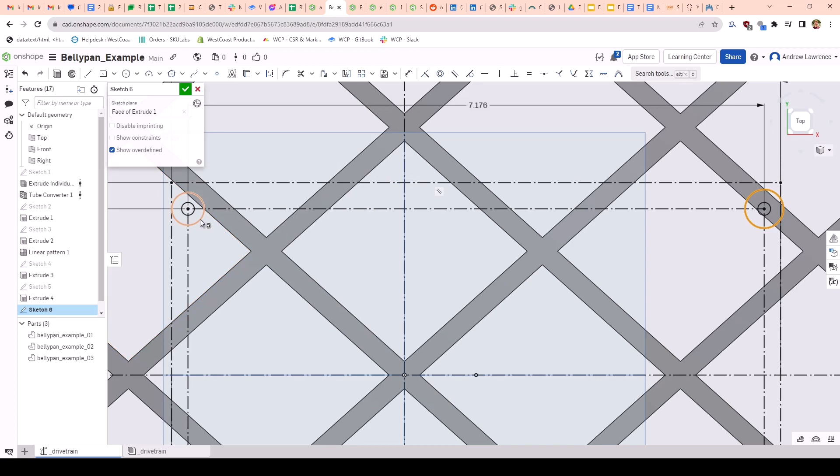Now, I'm going to make these all 1/2 inch diameter holes, because it sounds right. Does it need to be 1/2 inch? No. Is it better off for not being 1/2 inch? Is there a more optimal way? I don't know. I don't think it makes that much of a difference, truth be told.

So I'm going to make this as the sketch, and I'm actually going to leave this here. I'm not going to make a direct feature off of it just yet, and the reason being is I want to first make sure the holes are actually cut out holes.

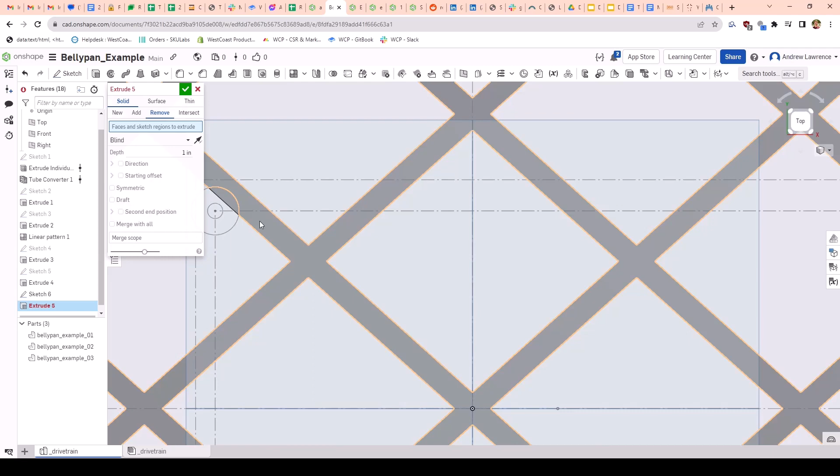So like this one's overlapping, so I want to make sure I have material there. I'm going to remove material. I'm just going to select all the holes, even if there's nothing there. Oh no, not that, I want the hole itself.

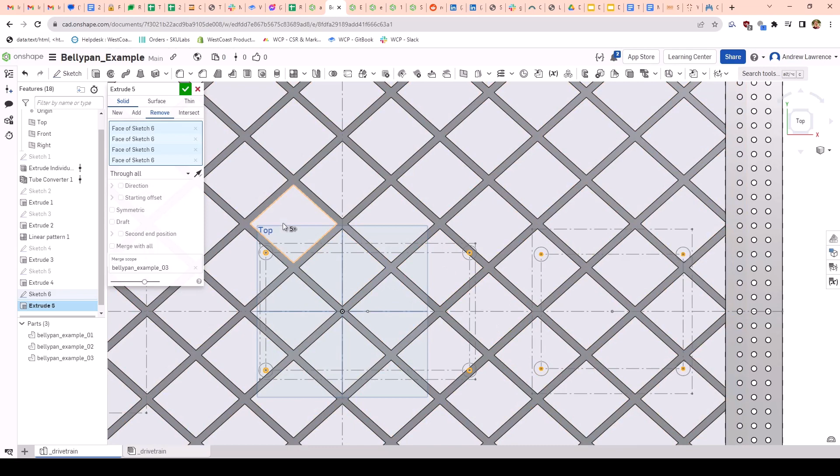The reason I'm selecting the ones even if there's nothing there is if I ever add anything earlier in the feature tree, or if I change something and I want it to update correctly, it'll treat the hole like an actual hole. You want to make sure you have at least something that's getting cut out. If you have a whole bunch of contours selected and nothing's actually getting cut out, the feature will fail.

So there's that, and then we're actually going to go back to the sketch. And beautiful, it's going to add that material in. We're going to make this up to face, up to this face. Merge with the Bellypan, and only the Bellypan. Very nice.

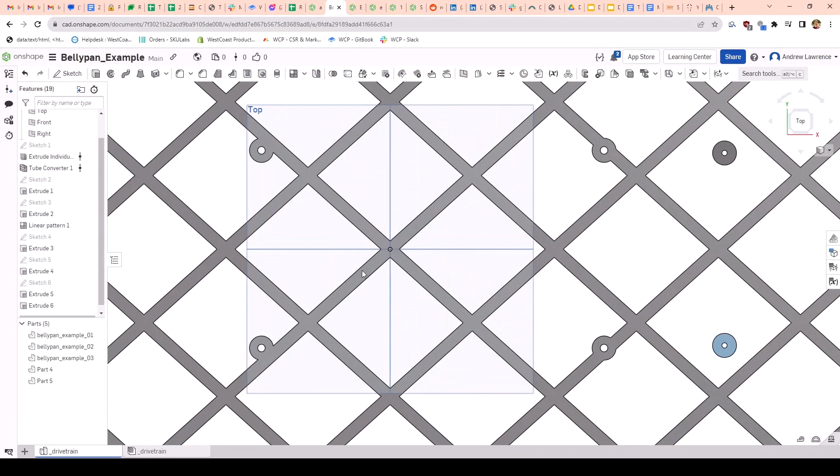So you'll see some of these actually work out real nice. This one right here just needs some fillets, and it'll be a nice attached area. Same over here, like the ones for the PDP are actually really nice. This all attaches pretty cleanly. It's already in line with a pre-existing strand, and it works nicely.

The roboRIO ones are a little messy, so we're going to add some extra things to make them more nice to us. Typically for these, what I'll do is I will create a line to the nearest strand. Usually I just do one line to the nearest strand. If it's really out in the middle of nowhere, I'll add multiple mounting features.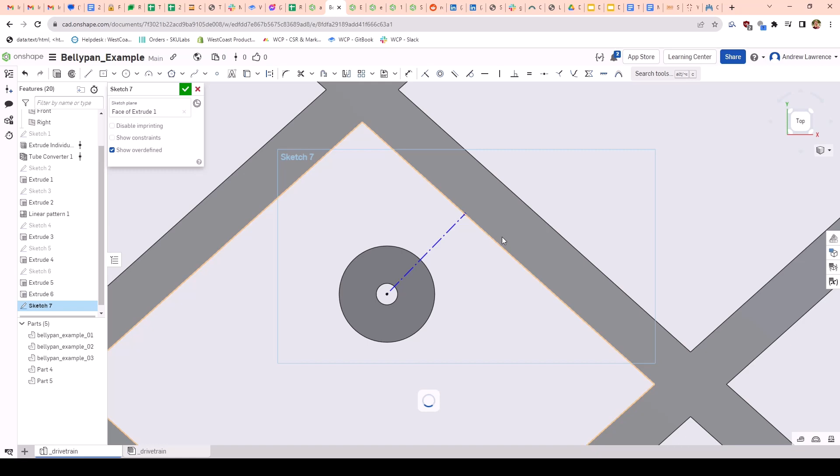And then give it a minute. So that's perpendicular there. Make this line. Ooh, let me redo that.

What I'm basically going to do is add material that goes between the floating hole, or the floating cylinder for the mounting, and the strands. I'm going to add that material in manually. So it's a bit of an involved process, but it takes a bit of time. But it's a surefire way to make sure your component is designed and built the way you want it.

Also, looking at the time, I see that this video is almost an hour long. I'm not even going to apologize at this point. You just need this much time to explain this kind of stuff. So if you've made it this far, congratulations, or I'm sorry, one of the two.

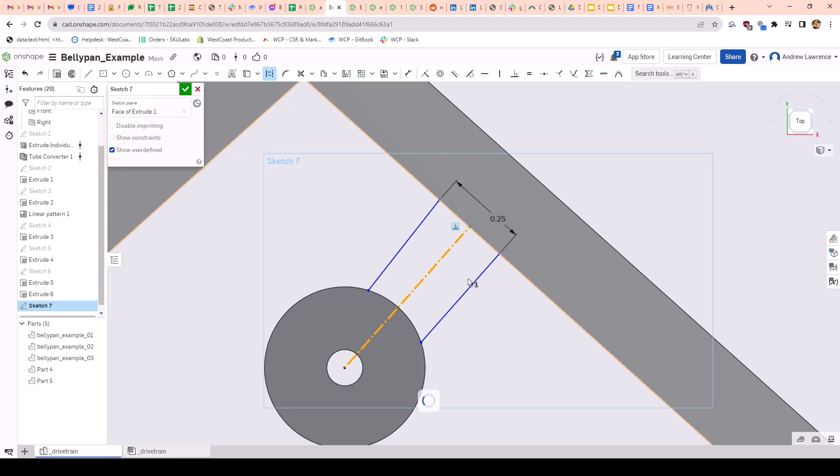Alright, that's a graphical error. I don't know what's going on there. Let's see.

You'll make those lines all parallel. And Onshape's really having a bad day, because I'm recording video. There it goes, and I'm going to close off this contour. Make this equal or concentric. I think technically both, I think I can do equal, concentric, or tangent. That'll all work.

Beautiful, so I have this little section here. That's fine, I could probably also mirror it across. So that's what I'm going to do. This guy's easy, I'm just going to select all three of these and say use. Because I just need to close off this. Fillets will fill in the corners here.

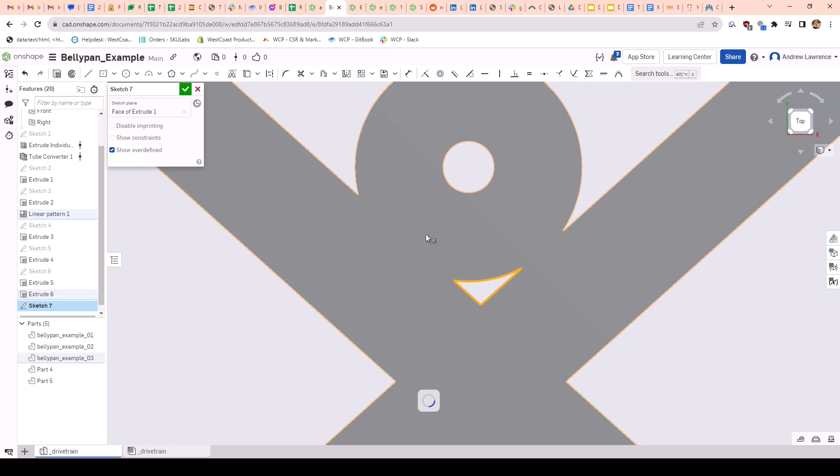Alright, so this is actually a really easy one. I'm going to go back to that top sketch that has the geometry I like to use. I technically only need one, but I'm going to use both.

So I've got that, and I'm going to mirror using this as the mirror plane. I'm going to select those. Shift E for extrude, and it's preparing the extrude, very important.

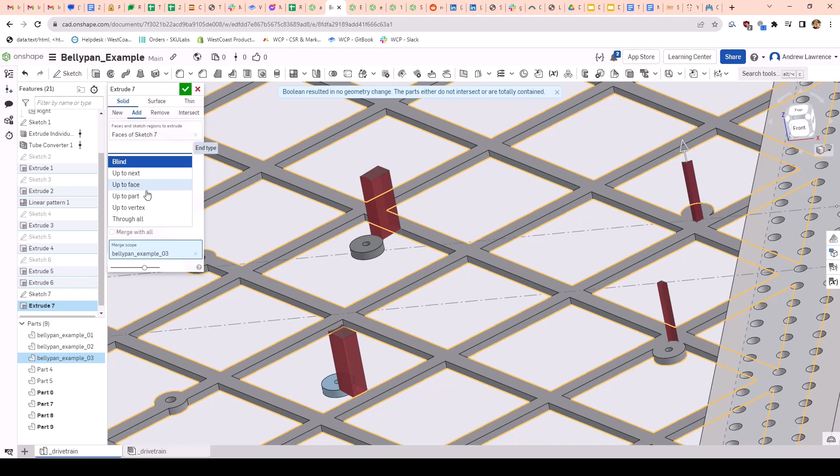So we're going to say we're going to add this to the belly pan. Instead of blind, it'll go up to face. Select the opposite side face. Wonderful.

And there you go. Oh, this didn't connect for some reason. Oh, you know why? I think I need to go to this and merge it. Yeah, I'll merge them all.

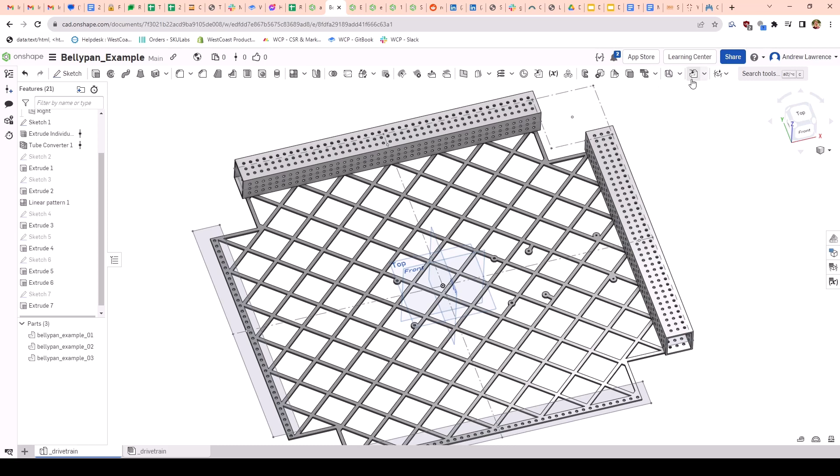There it goes, beautiful, one piece. So that's a belly pan with mounting holes for two control system components, and they're positioned how we want them. A final step would be to go to our feature scripts, and we'll say fillet all edges.

It wants a certain face. I forgot fillet all edges just from the top. So here's what I'll do instead, real quick. I'm going to do a normal fillet. I'm going to fillet the outside first. And the reason I'm going to do that manually is because these are going to be slightly different size. These are going to be 1/4 inch fillets.

I'm not going to do this inside corner just yet. I'm going to do something fancy with that in a moment, because I like doing the fancy style. You can judge, it's fine. So these are going to be 1/4 inch. In theory, I could just fillet them all, make them all the same size, and it will work. It'll be good, it'll be functional. It's no better or no worse for doing it this method.

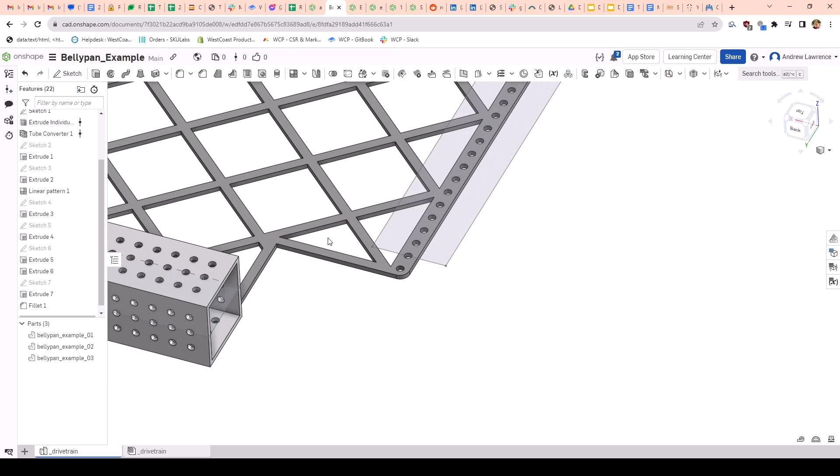However, I like to make things look nice. So the outsides are 1/4, and that's all symmetrical there. And the inside is technically a 1/4 inch off of whatever this is. So that's 0.603, wonderful number.

Ooh, where did I go? Oh, there. So I'm going to fillet these to be 0.603 plus 0.25.

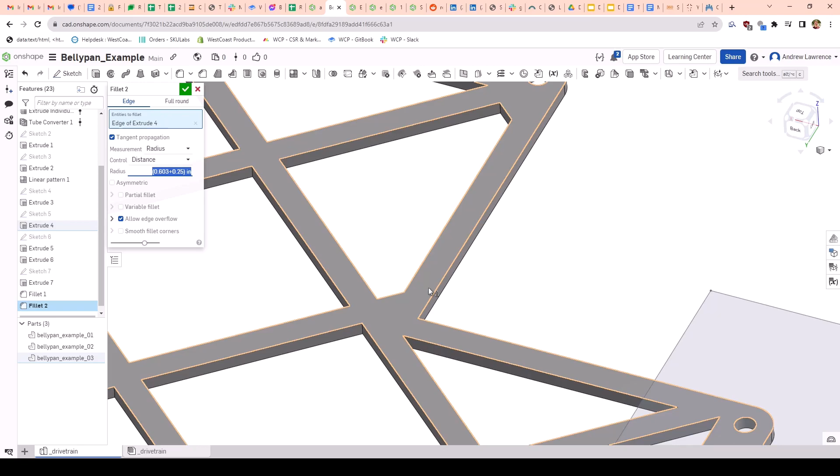All right, so we want to basically fillet everything that needs to be a different size, which is what we just did here, the outside and the inside. And then we should be able to go to the feature script that says fillet all edges, and it'll fillet everything that isn't filleted. We want that to be an 1/8 of an inch fillet.

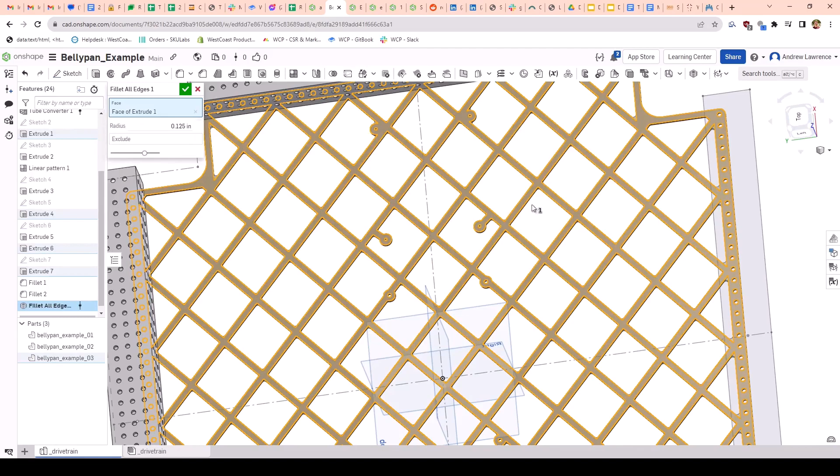And in theory, I should be able to select this face, and it should work, question mark. I've never actually done this on a belly pan. So let's see, it'll take a minute, but yeah, it looks good. Everything looks to be doing what it's supposed to be. Yeah, that all looks correct. Check mark.

Wonderful, cool, and there's our filleted belly pan. That's kind of awesome right there. Very easy to do. It only took, you know, an hour. Like an hour exactly. It'll be much faster when you're doing it yourself. Or not, I don't know how good you are at this.

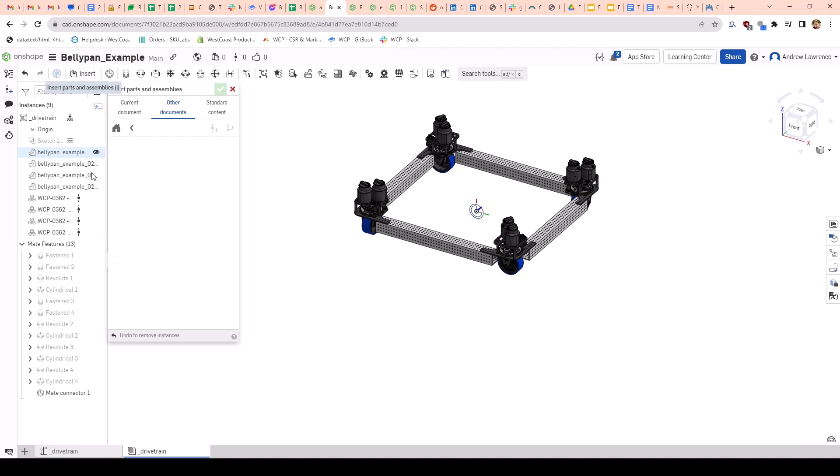There's our belly pan. We can insert it into our drivetrain. Let me see if we can get the right orientation. And we will mate it using a revolute and a cylindrical mate, so that way we can use 2 holes to mate it.

So there's our revolute and our cylindrical. Beautiful. So cool, there's our pocketed belly pan. Everything looks good, everything's in line. And now I'm going to real quick see, just to make sure that I did everything correct.

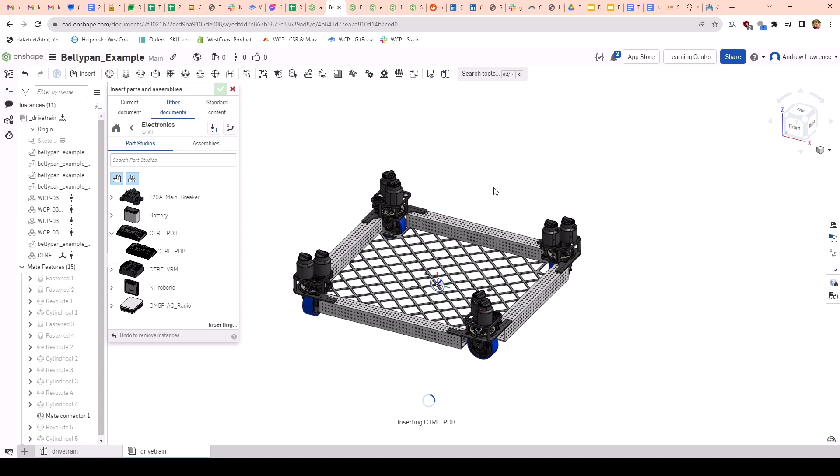I'm going to try adding the PDB in. I'll see if I can get my control system component to actually fit where I wanted it to go. So in theory, I should be able to do the same revolute cylindrical for 2 holes. So I'll select that one, and this mount. And then here's the real test.

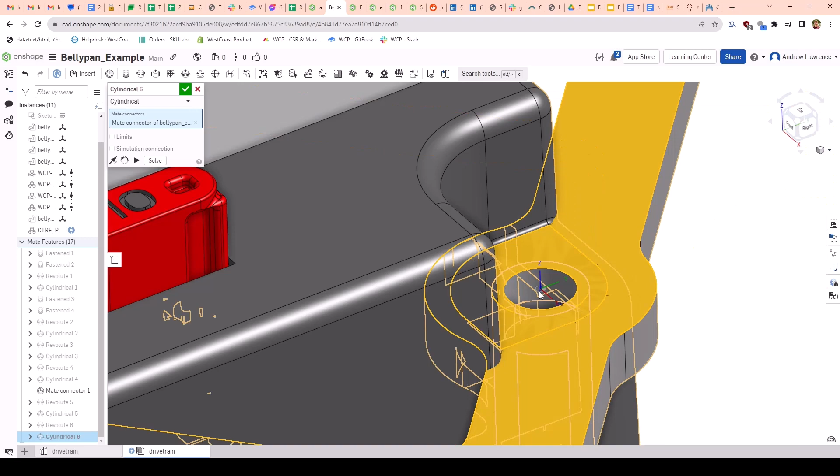If we did it correctly, I should be able to mount this one cylindrical. And in theory, it should work. And if it doesn't, either we did our modeling wrong or their CAD model is not correct. Both are possible. If we exit, it looks like everything fits, nothing's angry. Awesome.

Yep, and you can see this is a tapped hole. There, everything lines up, that's sick, that's awesome. And especially this is awesome for the PDB, because we have our power wires running out of here, and we can just run them along these strands in groups, and we can zip tie them to the strands. And the wiring's nice and clean.

All right, so that should be everything. Follow these steps, and you too can make your own diamond belly pan in Onshape. Alternatively, you could just not do a diamond belly pan at all. That's always a great option.

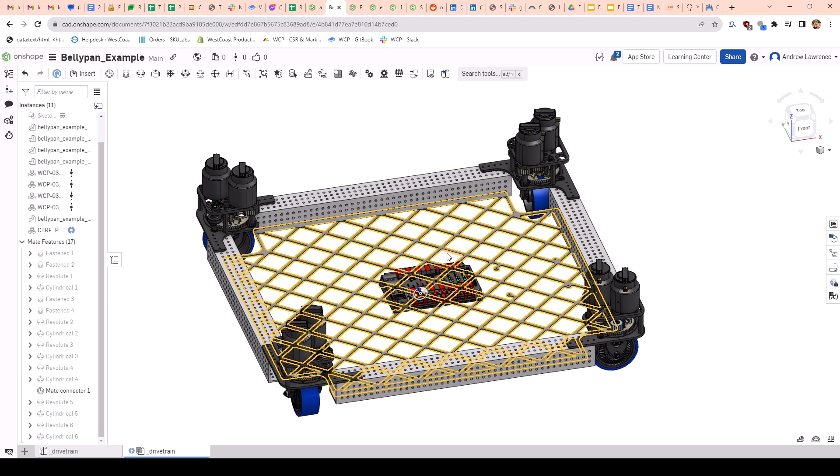The only purpose for the diamond belly pan with the very specific mounting is if you're really trying to get those added functionalities and features through the strands, or if you're trying to optimize for weight and still want the 1/8 inch belly pan. But again, if you're really trying to optimize for a lower weight, going thinner wall with less features is always more accessible. It's faster, it's cheaper.